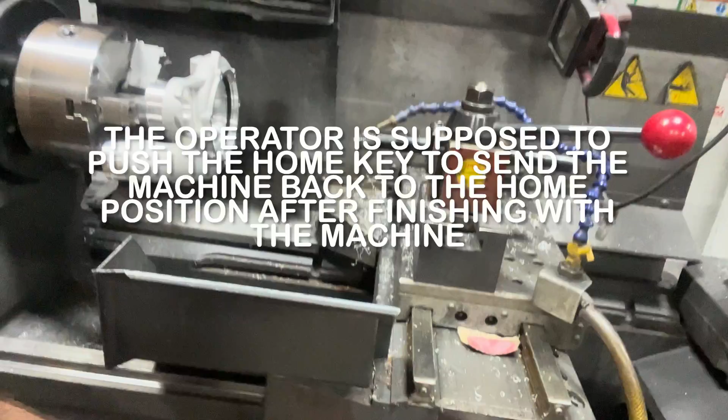I'm going to show you how to cut a bore out with a CNC machine. First, you have to turn on the 3-phase converter. Then you have to turn on the machine. Now we need to run this all the way back because Ian was too lazy to move it back. Otherwise, it's going to take a couple minutes to zero it out. So let's run it back by hand.

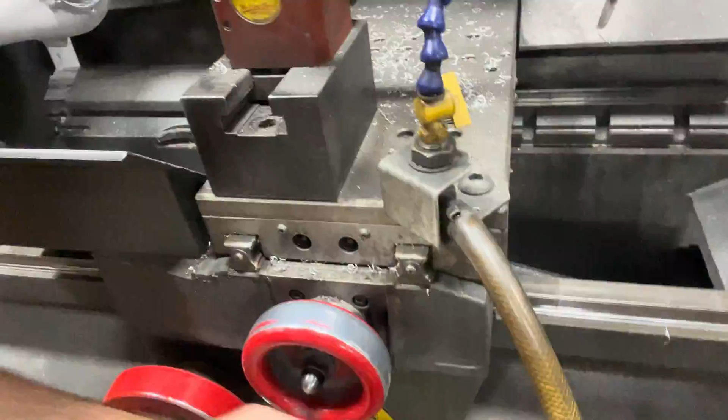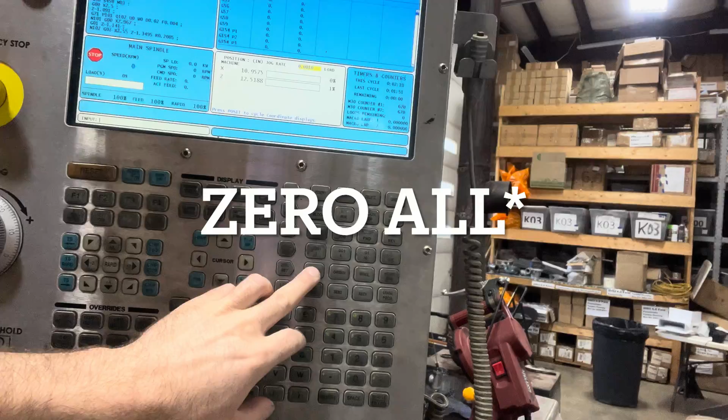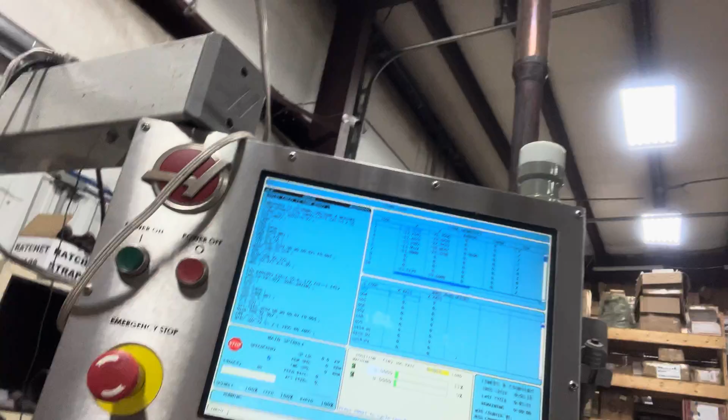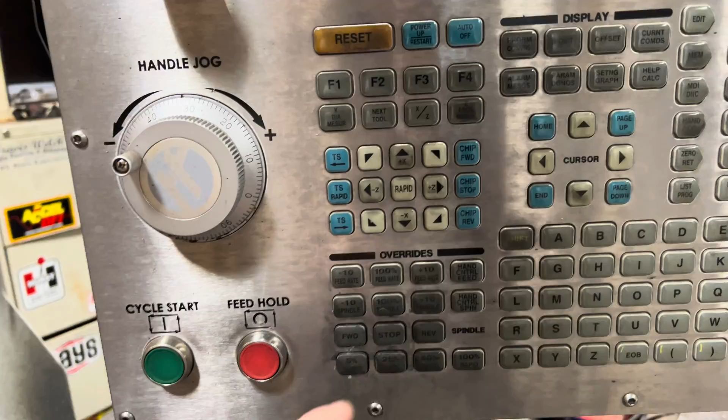And clear out our alarms. Cycle the door. Zero all. And reset. We're going to go over to hand jog. Select 100 thousandths and then hold the Z button. And you can also press the X button. X is right there and Z is there, and you know these are the directions you're moving.

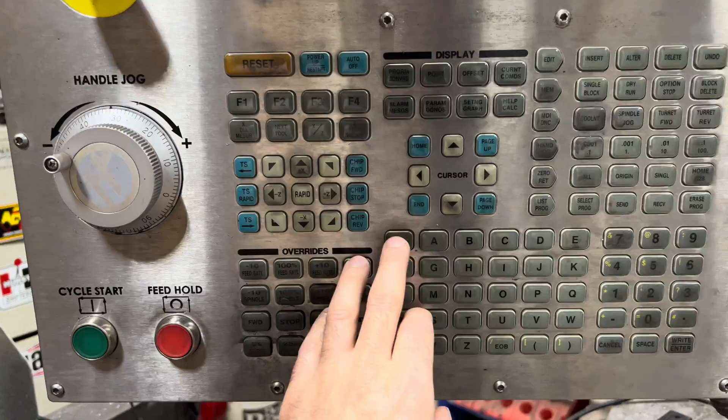Now we need to unlock the hand wheels so we can do it manually. Hand jog, shift Z, and shift X. So right there it shows you that you have manual capability of this machine. First thing I'm going to do is make a cut on the bore, and then I'm going to press the X measure button, and then I'm going to measure that, and then I'm going to enter that information in our

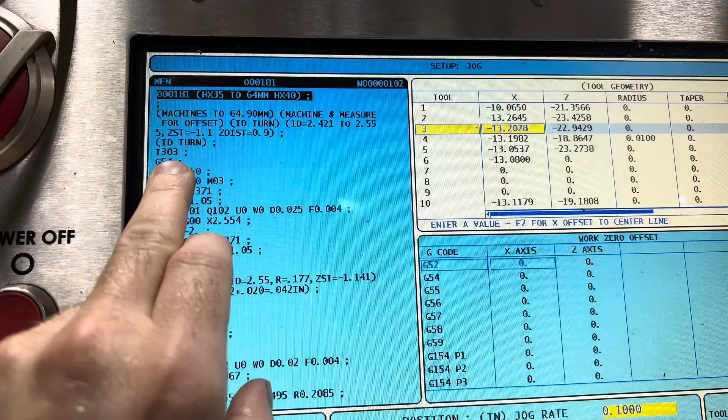tool selection. So let's go down to tool 3, because we'll reference tool 3. See T303, that's tool 3. If it was T202, that would be tool 2. We need to turn the spindle on, so we're going to press forward, enter the RPM we want. So I'm going to go with 600. And you could turn that down by pressing the spindle speed down.

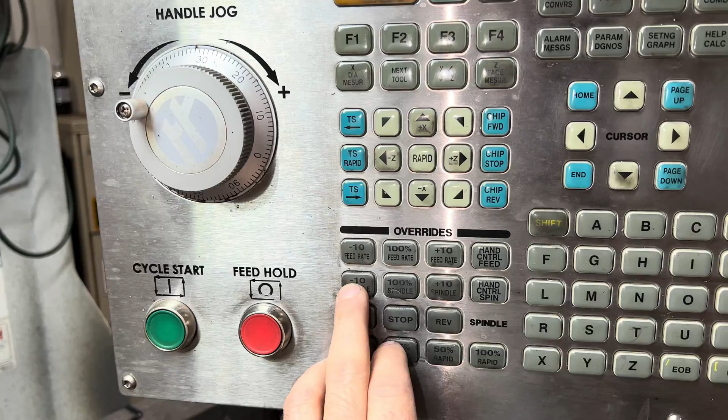And we can press forward and forward. It's not spinning the full speed because of the gate sensor. So there we go. So to bypass the gate sensor, I pull the door back a little bit. So that is to prevent people from getting hurt. So you see, if the door is open, it's not supposed to spin.

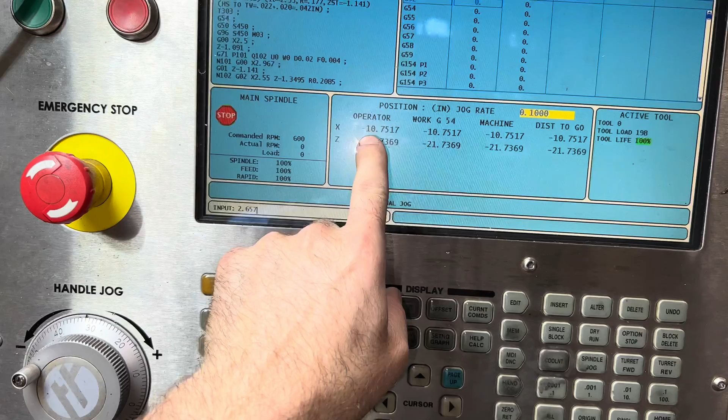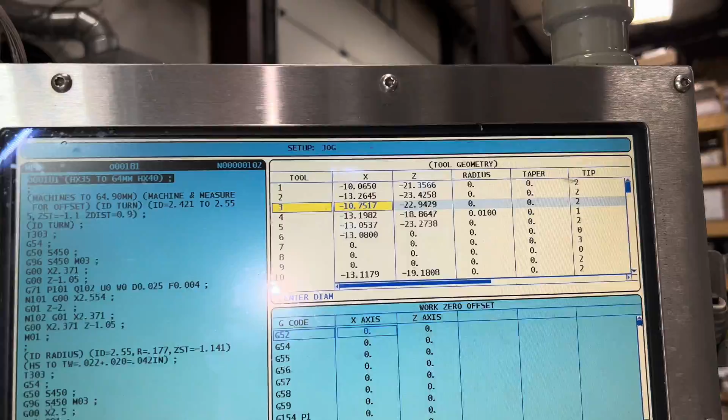Now we're going to hit the X measure button. This is your X right here. So when you press this button, you need to make sure that that was in the same position it was when it made that cut. What happens here when you press the X measure, whatever tool you're selecting, you're on tool 2, you press X measure, now it's asking you to put the diameter of whatever that part is after you just cut it. So what I need to do is go down to tool 3,

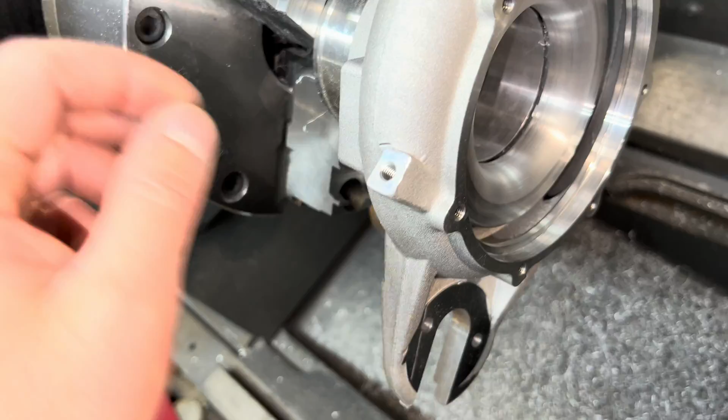which I press the arrow key, X measure. So now it's going to ask me to put in the diameter of whatever that was that I just cut. Now I can move the tool so I can take my measurement and make sure it cut all the way around. When I measure this, which is a tool I use to get my measurement, I'm getting 2.449. This tool will expand and retract.

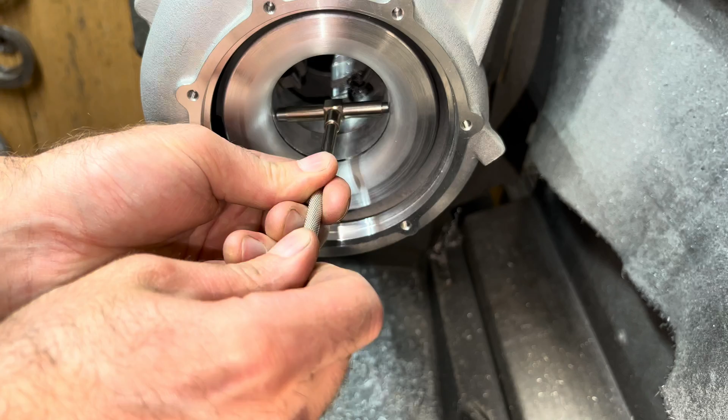You release it in the bore, and you wiggle around trying to make sure you got it even, and then you tighten it back up so you get that measurement, and then you pull it back out, and then you measure it. Once you get that measurement, you're going to put that in right there. So we need to go over here. 2.449 inches. And then you press enter. It puts it right there. Once you think it's good, tighten it up.

So now I want to get a Z reference point. So I'm just going to bring the tool in here until it touches, Z measure on tool 3. So it just changed that number right there. Now I need to write the CNC program. When I want to start this program, I want to start it somewhere close to the beginning of this cut. So we can do a start from like right here.

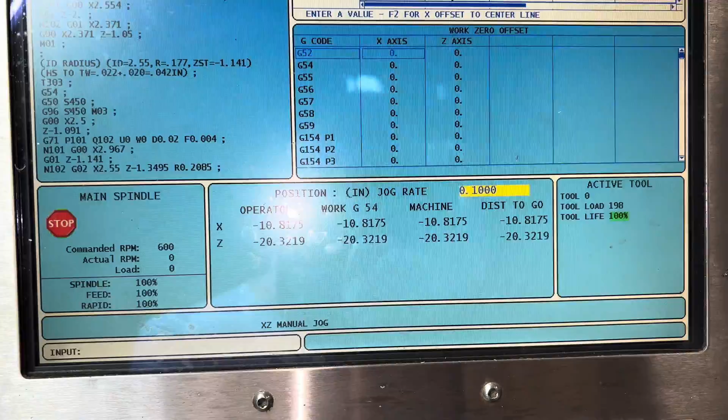So now what I want to do is take my current Z position and subtract it from where I just measured. So that will give us our Z start position. So the way that I determine the Z distance is to move the tool in the farthest that I want it to go to, where the end point is of the cut. Once I get the tool moved there, then I'll record that information here.

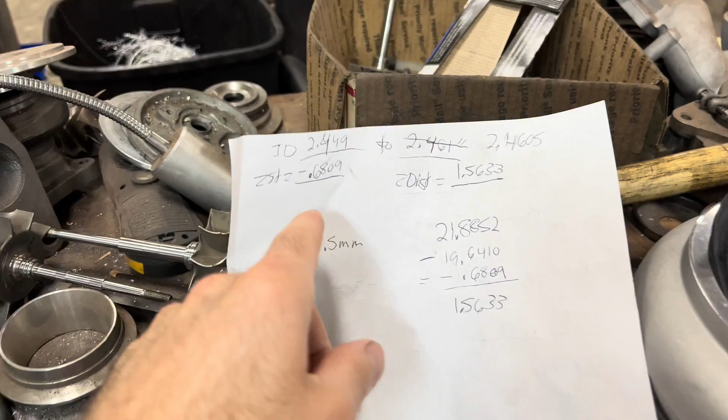Take this number and subtract it from the Z reference point. And then I'm going to subtract it from the Z start point that I chose, which is 0.6809. So basically I've taken this dimension, subtracted it from the dimension that the tool is going to, and then I'm subtracting out the Z start position, which leaves me with this distance here, from the Z start position to the Z end, and that's going to be our Z distance.

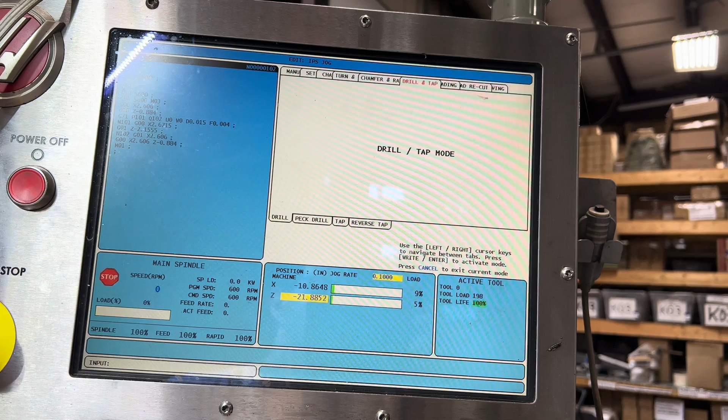To enter this in, we're going to go to MDI, manual data input, program conversational, and then we could choose through all these menus. I'm in the turn face menu, an ID turn. So if we want to back out of these menus, press cancel, and that will go back, and you can go through the menus. Of course, I just want to go to the turn face menu, but we can do radius, there's a lot of different options here. So we'll go to it as if we're running this program. So right here, ID turn face.

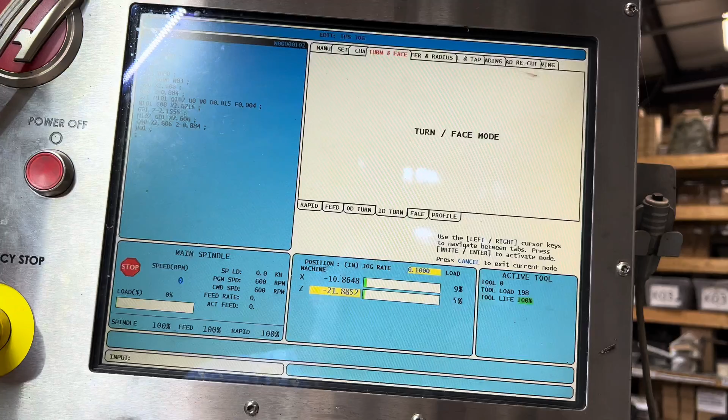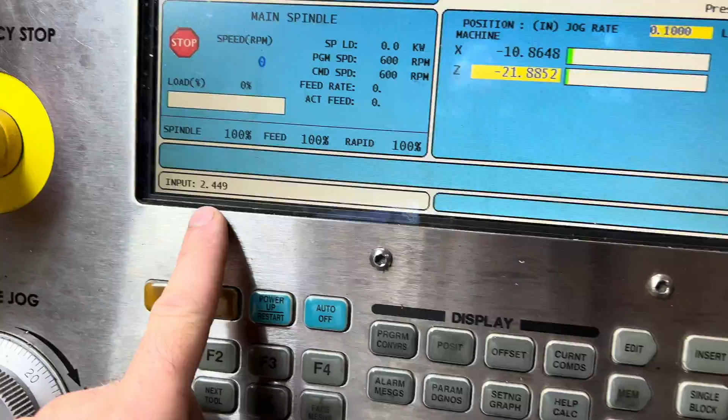Now here's where we put in our information. Starting at the 2.449, pad 2.449. That shows up right there. Enter. And we want to cut that to, I took the wheel dimension,

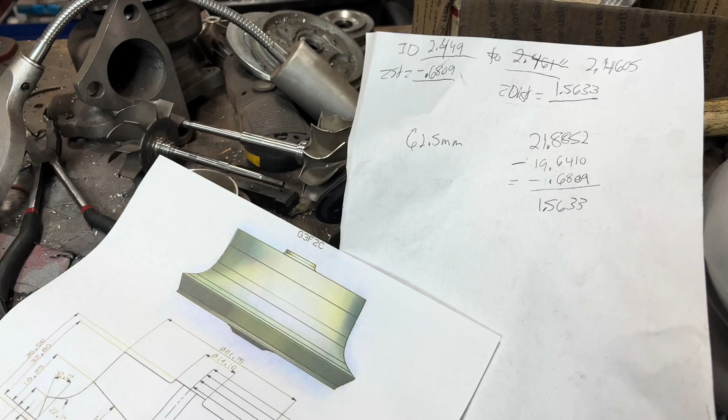61.75. It needs to be 0.75 to 0.90 bigger than the wheel, depending on which turbo you're working on. For this one, because it's ball bearing, I'm aiming for 0.75 to 0.8 max. Some of them are actually 0.85, like Mitsubishi turbos are, like TD05 stuff, but I usually like to max out at 0.8, just so I'm under, and we could always cut it bigger.

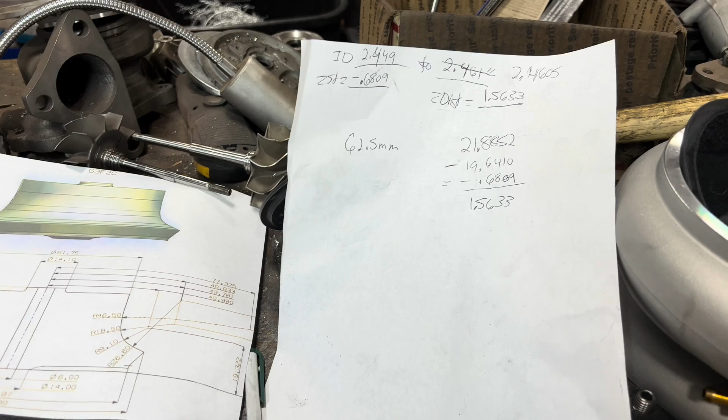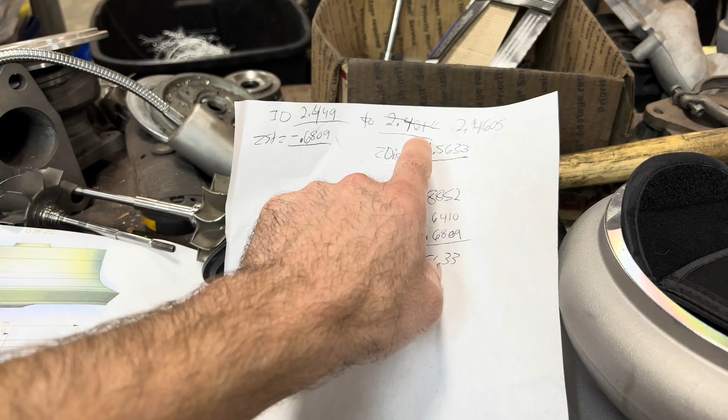So on this one, I'm going to do 0.75 is what I'm planning to cut it to. I'll measure it, and then I'll try and finish my bore at 0.8 over. So 0.75 over is going to be 62.5 millimeter. Convert that into inches, and Google rounded that up, but it's actually supposed to be 2.4605. So that's going to be my diameter to cut to.

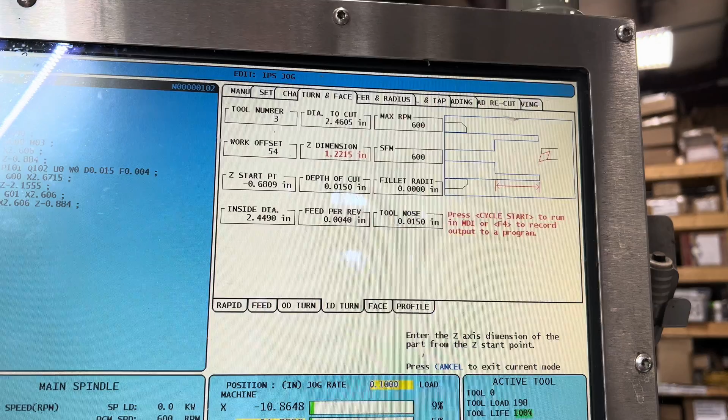So 2.4605. And it shows up right there. Enter. Z dimension. So that was what I explained here, where we did all that math to figure out how far the tool is going to go. 1.5633. Z dimension, 1.5633. Shows up here.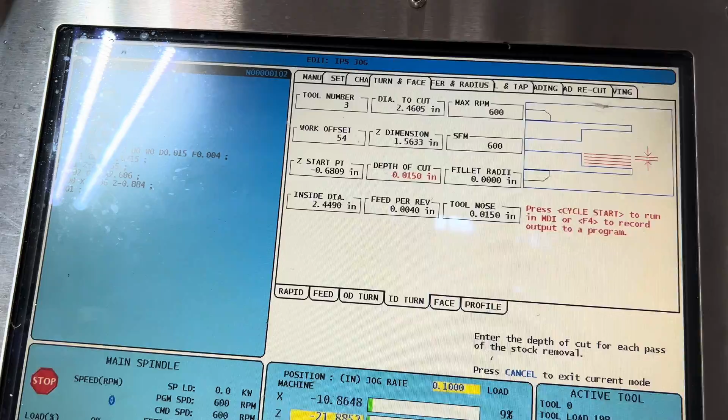Wait, oh, pressed the wrong button. I gotta delete that. So if you want to delete it, you just press cancel, and it's your backspace. Depth of cut, I'll do 15 thousandths. We're not really cutting that much out anyway.

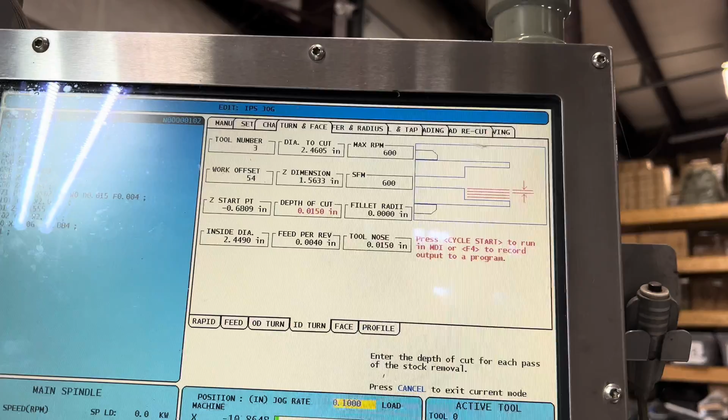And you can change your RPMs up here. So this one, I might want to turn that up to 720. Then I can use the spindle overrides to turn it back down. And I can always turn it back up if I want to. 20.

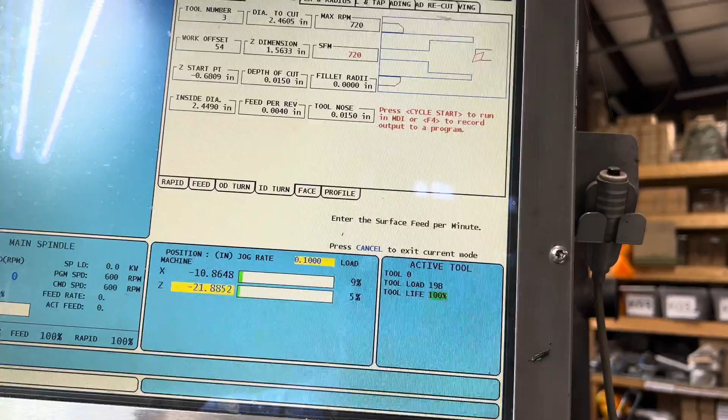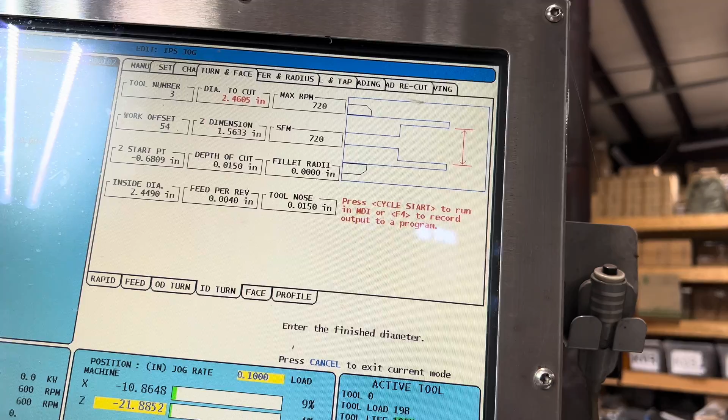I want to output this, so F4. I didn't even realize it actually gives you information here based on your selection. See that? And it gives you a demonstration there of what the cut it's actually making. Anyway, so we want to output this, F4.

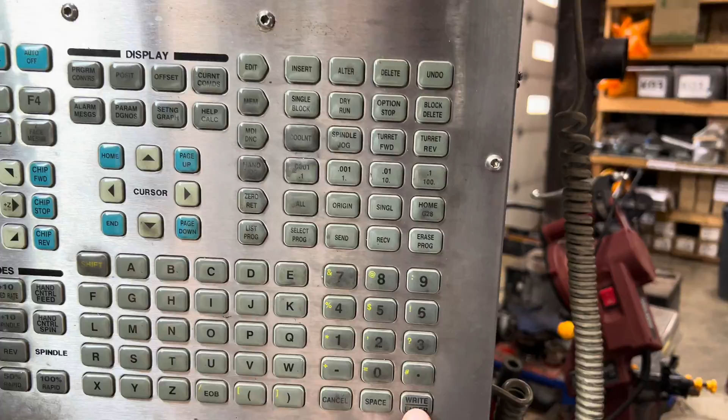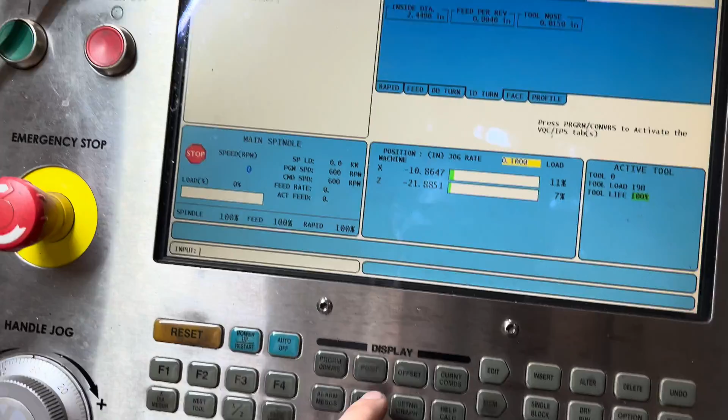I'm going to do it to MDI. So this is basically our clipboard. Press enter, and it puts it over here in the clipboard. So you see that 720, we know that's the one we're working on. Now you can click MDI and you can run it from here. Or you could also do a graph so you can figure out what this is going to do before you run it. So let's do that.

But before we do that, we need to pull this tool back out. So I need to go back to hand jog and plus Z. Now that the tool is in a safe position, let's go to MDI. And I want to do the settings graph thing. So we press that setting graph thing twice. And then we want to run this, but we need to turn our execution speed down, so we'll go to F3.

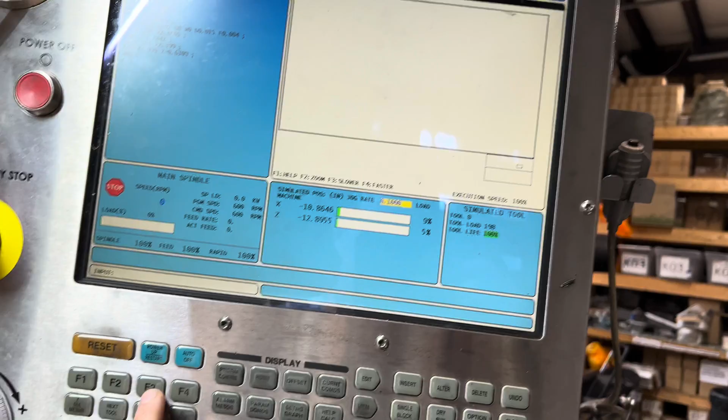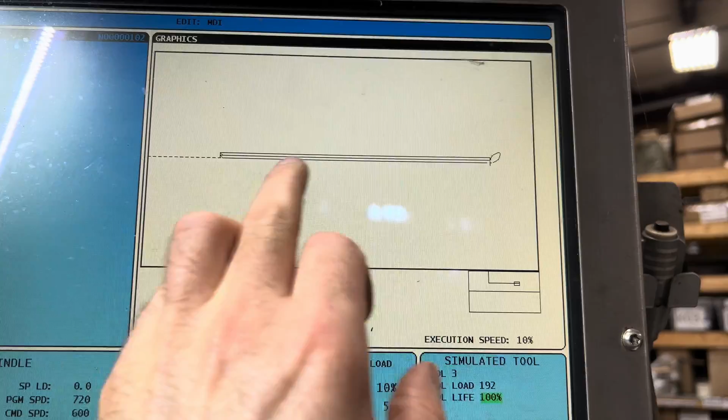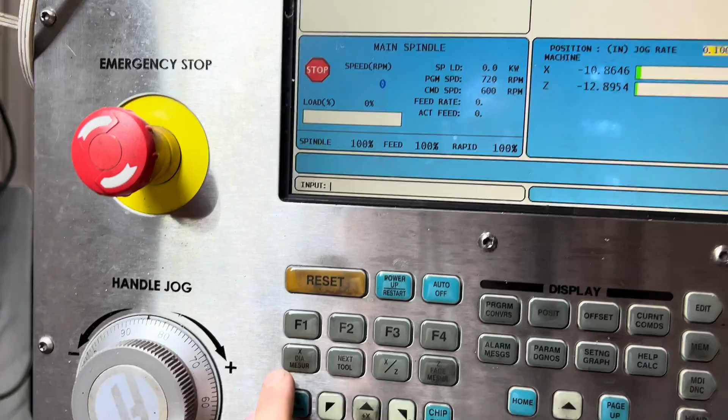And cycle start that and see what this actually does. So this is just, it's coming in, it's boring, it's boring, and then it's done. We can run this if we feel comfortable. Yeah, we're on MDI, so now we can run it for real. We'll turn our spindle speed down. Right now it's at, what, 90%? Oh, it's at 100. Turn that down. Cycle start. Turn down our rapids right here.

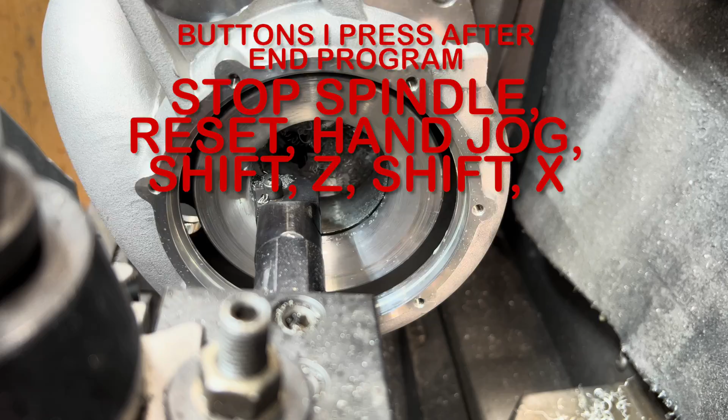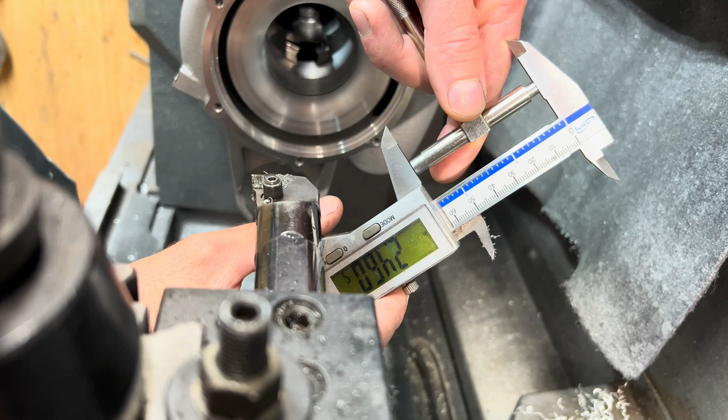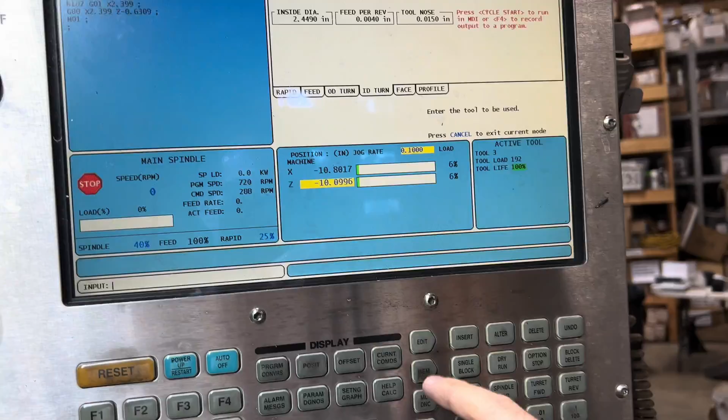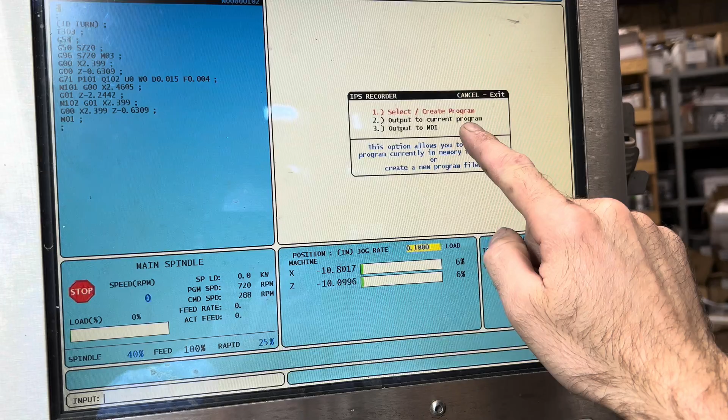So if we want to save our program, we're going to go back to MDI, program conversational, so we're over here again. And basically the white screen is where you are. So now I'm on the program, I'm on the edit menu, F4, create a program. We can output it to a current program or output it to our clipboard, which is MDI.

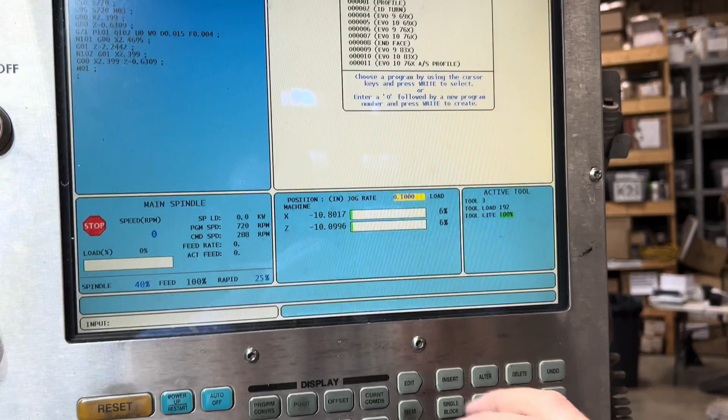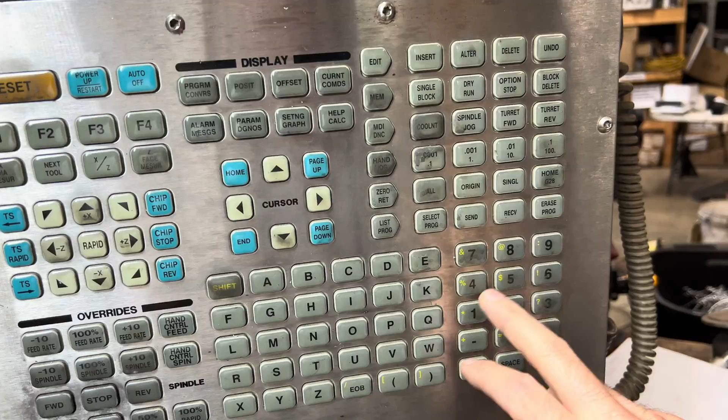So I'll just do a demonstration, press enter. And you could select from here if you want to scroll forever, but there's over 200 on here, so we'll just do a random program. O00515. But it always has to start with that letter O. And it has to be this many digits here. I'll press enter.

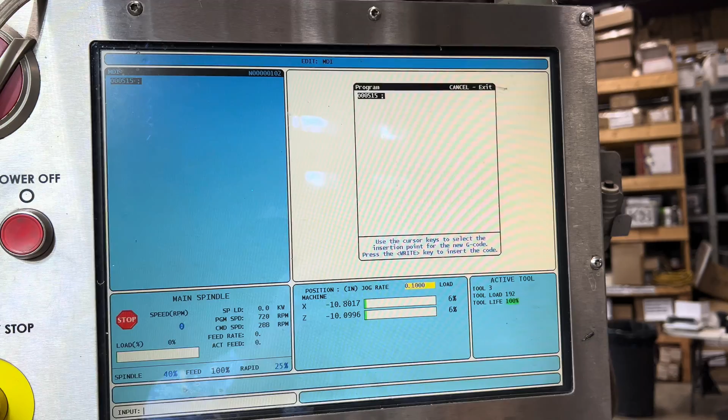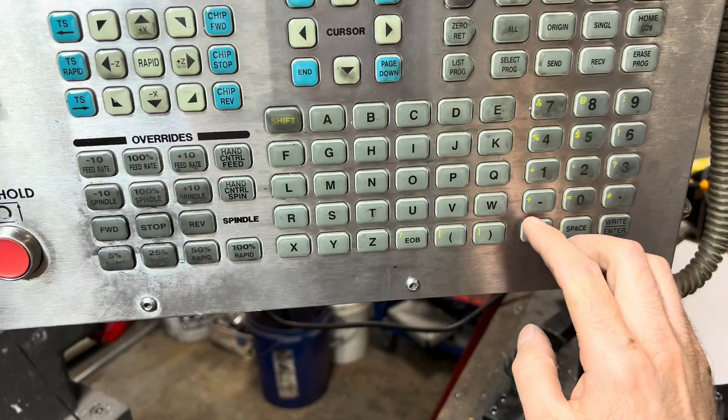This is now program 515. Let's just go ahead and press enter again. Memory, because that's now our program 515. And then we want to make some edits. What's the name of this wheel? Oh, G3 F2C. 61.75mm, comma, parentheses, and that puts it right there.

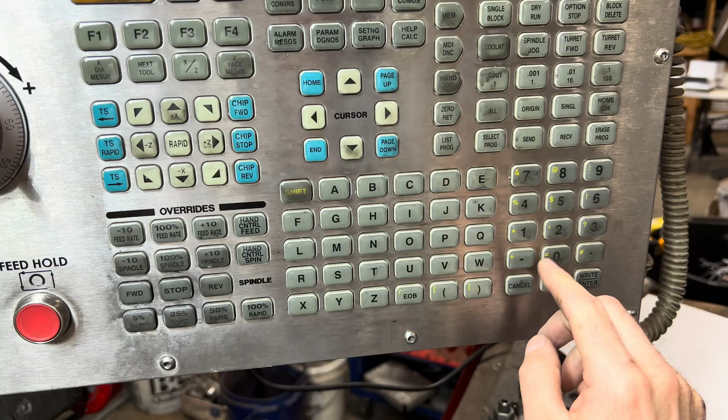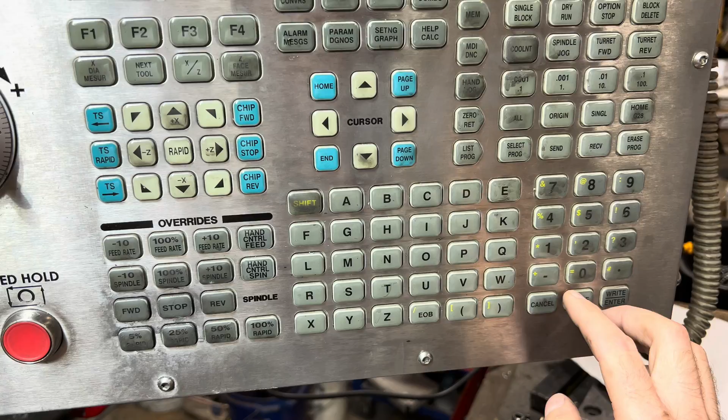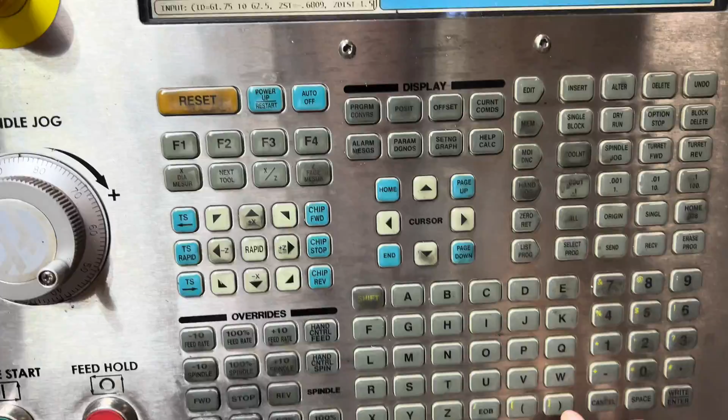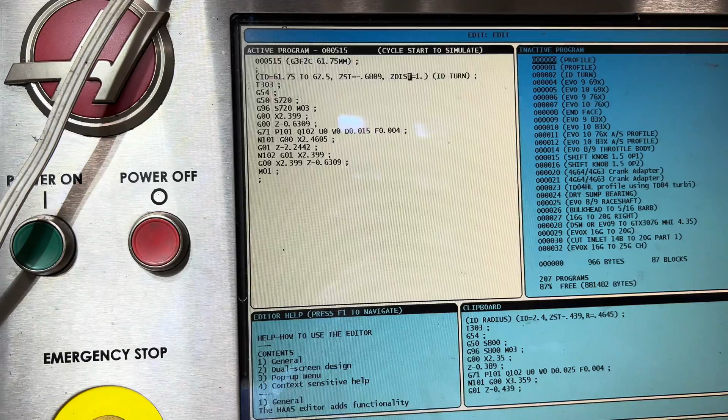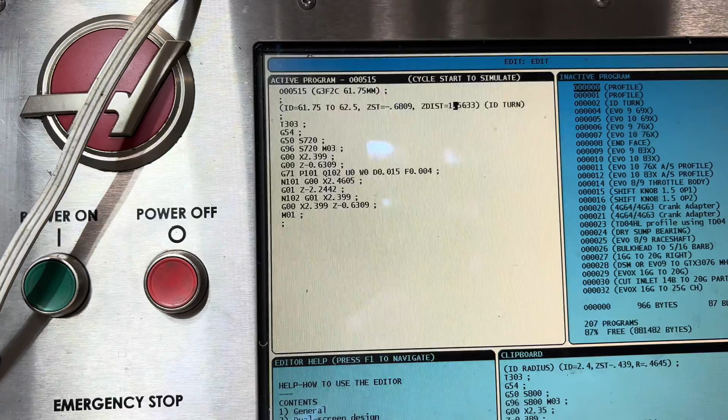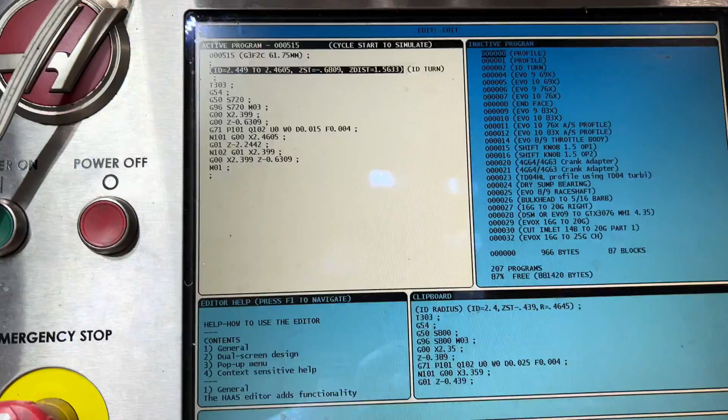Insert. So I wrote down the information I put in the program, but I put that in millimeters, so technically I need to go back and change this to inches. So I'll do that. So there's my edits for inches. Edit is where you can change anything you want to. So I could change that spindle speed if I wanted to. I could change a lot of stuff. I could change the tool number if I wanted to.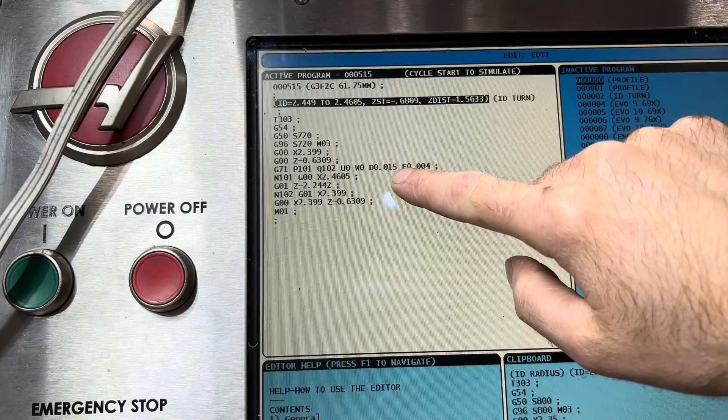The D right there, D point 15 thousandths. That's how much it's taking off per pass. So I could just change that to 20, 25, whatever I wanted to. Feed rate, 4 thousandths. I could change that, but I like 4, so I'll just leave it there.